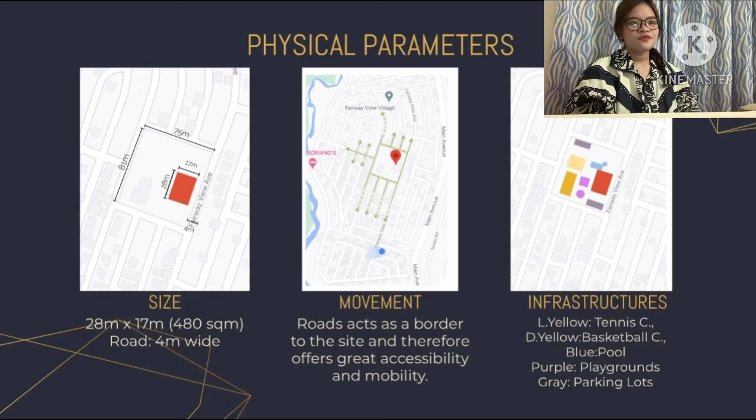As seen in the map, the road acts as a border to the site and hence ensures great accessibility and mobility for everyone. The actual site is surrounded with different infrastructures such as basketball, tennis court, pool, playgrounds, and parking lots. The site has enough plantation and therefore gives a strong sense of nature. Its man-made features are a few lampposts, as seen in the illustration, that provide enough security at night.

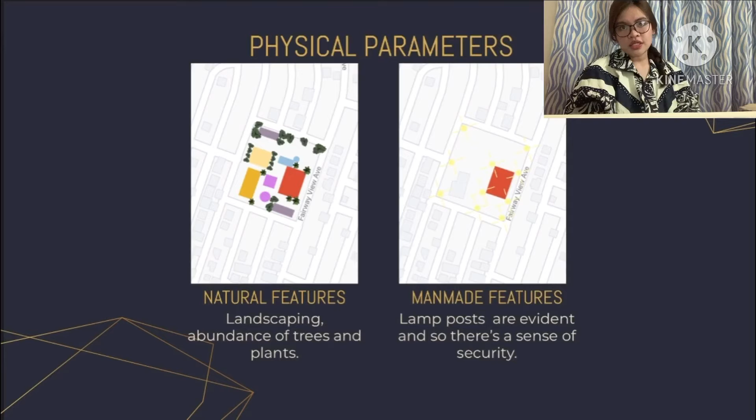For the sensorial experience, for the visual, it's very peaceful looking, it's spacious, and there's an abundance of the color green as shown in the video. For the olfactory, there is sometimes a strong smell of chlorine whenever they are cleaning the pool. For the somatosensory, the place has its typical tropical weather and therefore could get really hot or breezy in the afternoon. As for its sun path, the sun sets in the west and rises in the east.

Lastly, for the auditory experiences, there are often, of course, noises coming from children or people that go here since it's a clubhouse. And the actual sound which is prevalent is the noise coming from the ball bouncing or the players from the basketball court.

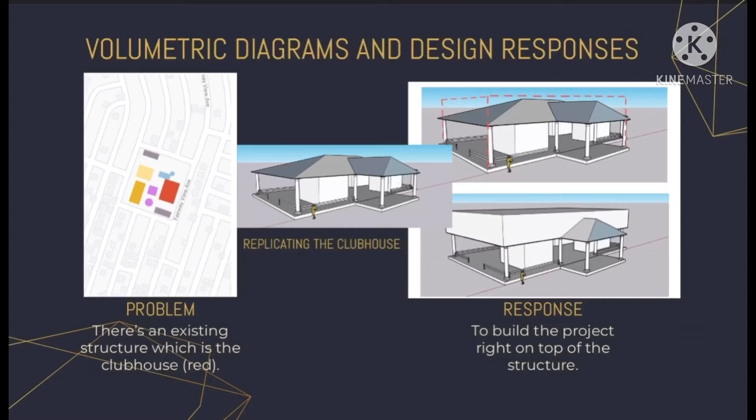The next information that will be tackled is about the volumetric designs, diagrams, and design responses. For the first problem, the site chosen already has an existing structure. Therefore, the strategy is to build the project right on top of that structure, giving a sense of parasitism.

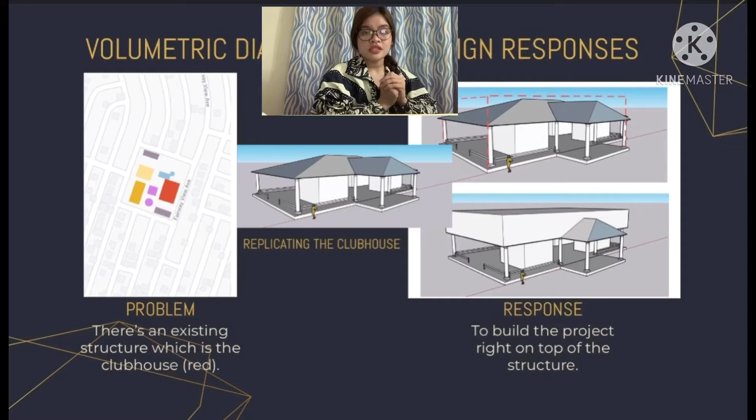Next, the existing structure has one side that offers more support than the other. As seen in the illustration, the other side has rooms. So hence I subtracted from the former volume and now it's divided into two parts, having one side heavier than the other.

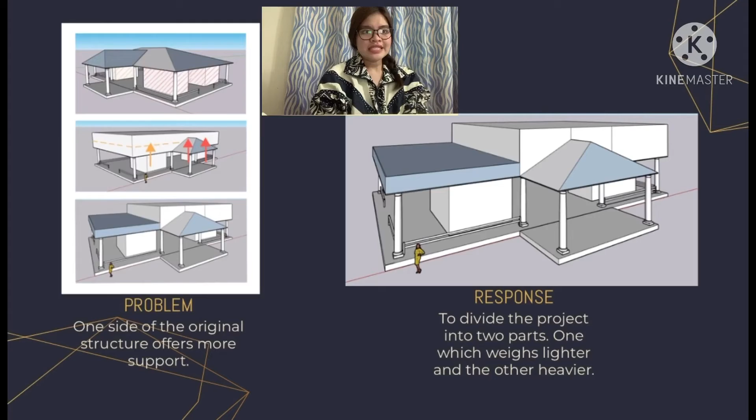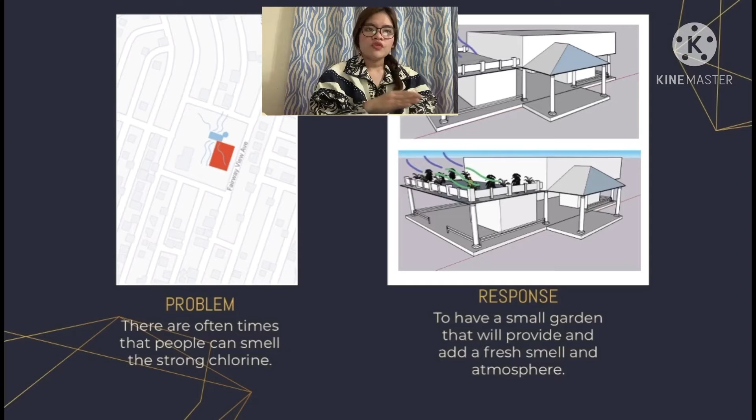For this slide, as mentioned in the sensorial experiences, there's often a strong smell of chlorine, and that's why I had a garden installed right in the lighter part of the project. These plants can now provide fresh scent in contrast to the chemical scent.

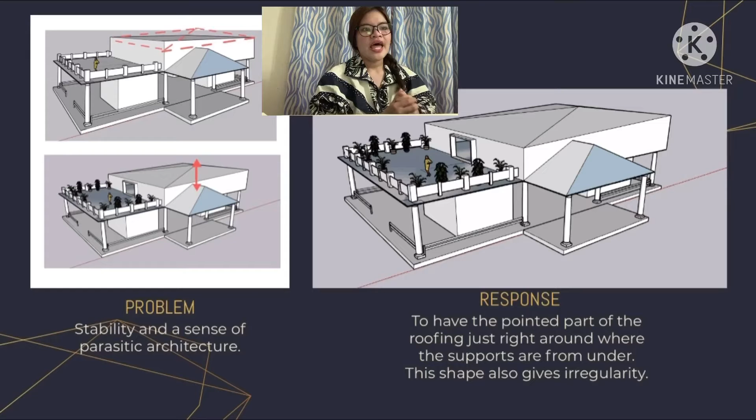As for the design of the roofing, I had the tip placed or centralized where most support from under is from. This way, the structure can give more stability and also somewhat irregularity in its design that contrasts to the usual symmetrical design of the subdivision. Since it's Mediterranean and somewhat traditional, it's very symmetrical. And even the structure below, which is the clubhouse.

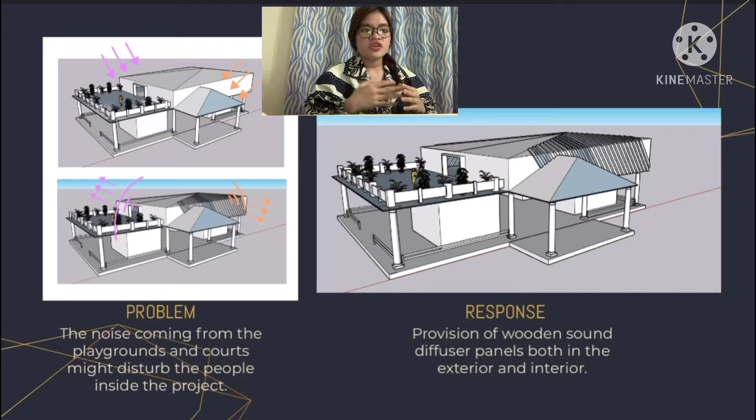Again, as mentioned, there are noises coming from the court and playgrounds. Having this place to be a meditation or spiritual center, it is important for it to be serene, especially on the inside. Therefore, I'll be incorporating wooden sound diffuser panels on the exterior, which are the rib-like features as seen in the illustration, and also inside the structure.

This slide shows the floor plan. The sizes of each room are based on the socio-cultural parameters that were mentioned before. As an example, half of the subdivision population is Catholic and therefore the space provided for them is the largest. The multi-faith space as a whole is 17 meters by 19 meters, and the garden or the common space is 17 meters by 9 meters.

Obviously, the multi-faith space is where people can meditate, pray, or reflect. The garden, on the other hand, will be the common space, since I've noticed that one of the problems in this subdivision is that people rarely interact. Not many people actually know one another as they prefer to be just inside their homes.

Now, of course, their faith can now bring all of them together in one place. Now, this is where all of these people can gather to hang out, improving the community's ability to communicate with one another and form connections with one another.

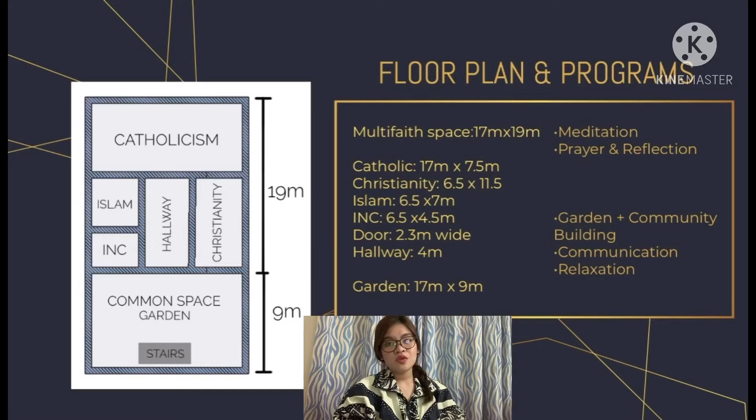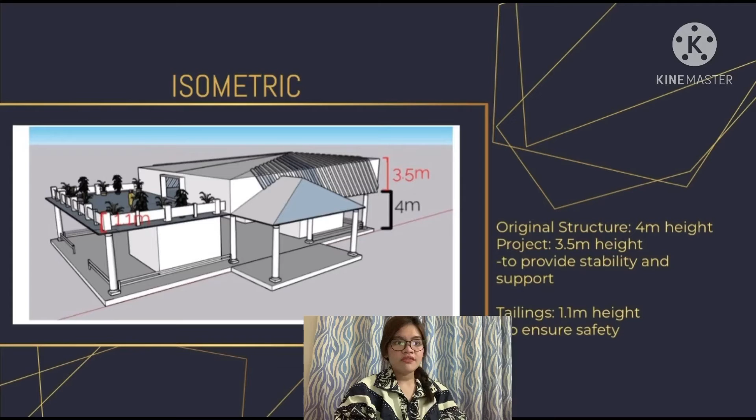As for its isometric, the measurement of the existing structure is 4 meters in height, and the project is 3.5 meters in height to again provide stability. The railings on the garden are 1.1 meters in height to provide enough safety, especially when there are children around.

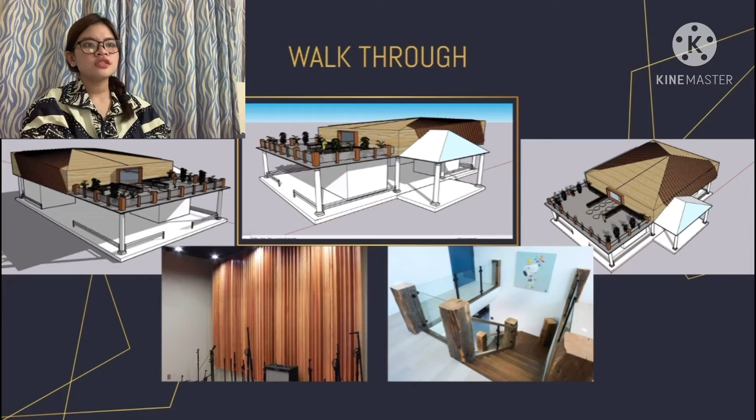Now for the walkthrough, you can see the rendered version of the project. Again, the white structure under, the existing clubhouse, elevated and given a new feature for people to go to. The walls of each room's inside will be these wooden panels, which are also the sound diffusers. Meanwhile, the railings have wooden posts and glass in order for the passersby to see the garden.

In addition, each room's inside will be enclosed with doors, so that a person from another religion wouldn't see icons that can be offensive to them. Each room is also soundproof in order to ensure serenity and of course to prevent any disruption of prayers.

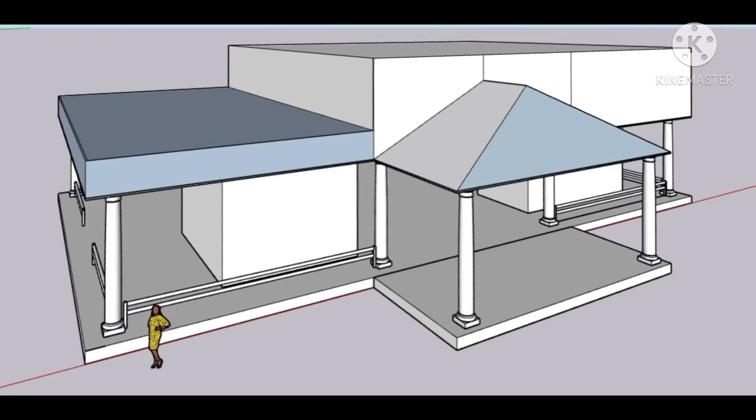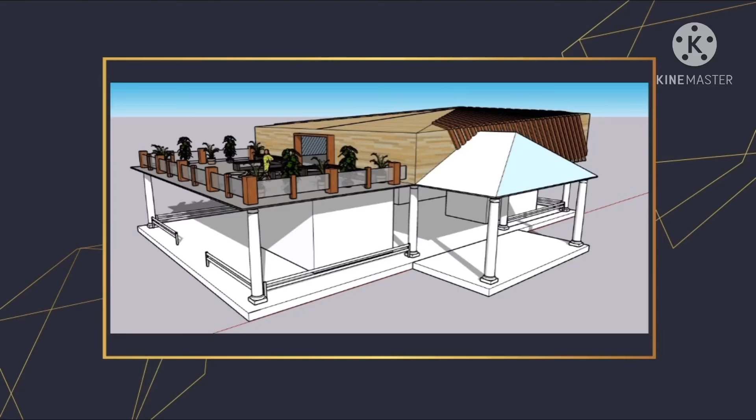This is prior to the rendering process. And now the rendered version. This is the frontal view. And this is for the top view. So you can see that there are stones for the surface of the garden. And the plants are all located in pots, so there isn't actual soil or ground in there.

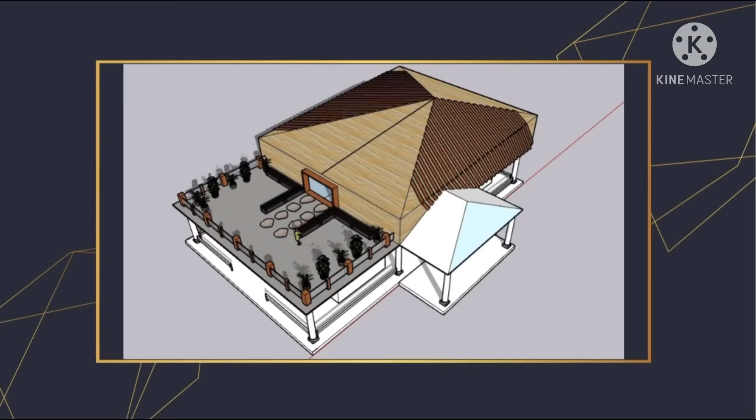My offering for the community is Space Ataraxia, a multifaith center. This present is not simply for giving a solution, but rather for giving a new opportunity for all types of people. The project ought to bring all types of people together despite their different beliefs and cherish their diversity.

This will not only strengthen each person's spirituality, but also the relationship of the community, creating a healthy space for everyone to meditate and thus creating better connections, familiarity, and intimacy.